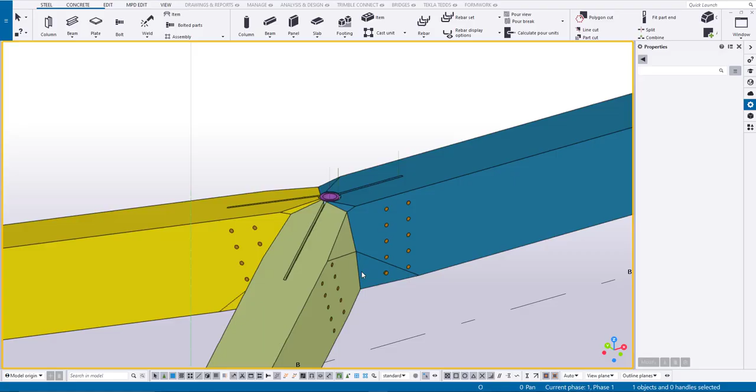This node is quite unique and interesting, as the beams connect asymmetrically and at different angles. I will show you techniques to make modeling easy and enjoyable.

First, insert the central beam to which steel plates will be attached. Everything will become clear soon.

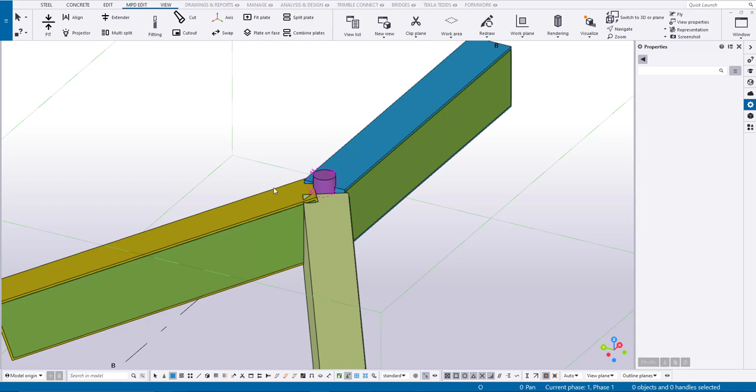Using the new plate on face command, create plates on the beam's faces, and then trim these plates to the desired size using the split plate command.

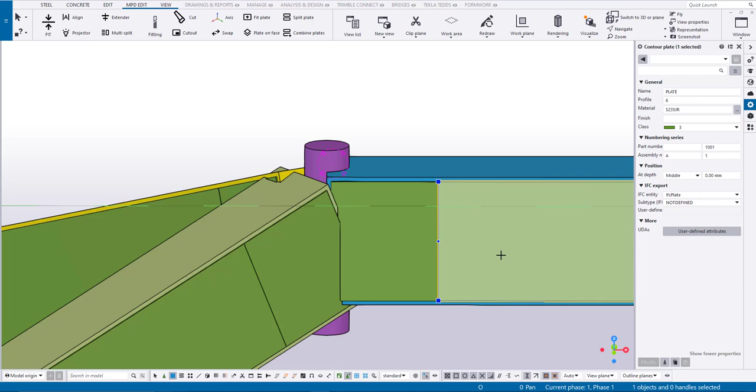A little tip from Projector's creator: this way, you can move the plates to the middle of the beam. Select the beam centerline and horizontal projection direction, and the plates will magically move to the middle of the beam.

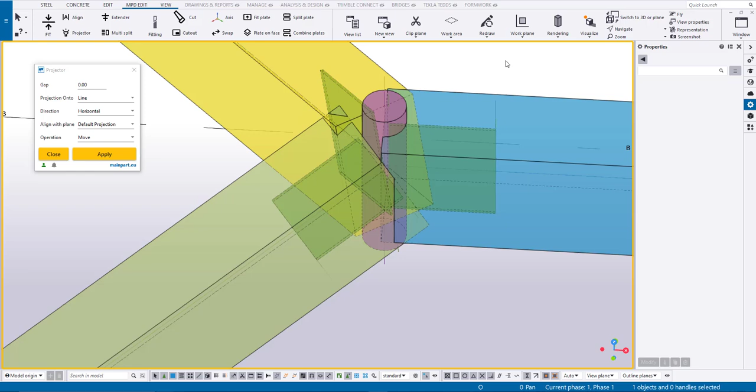Next, using the popular fit command, align the edges of the plates with the central beam, the pipe to which these plates will be welded.

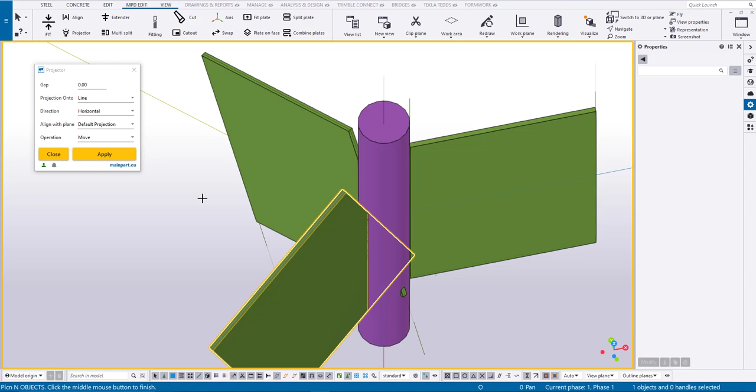Using Tekla's standard command, create cylindrical holes in the beams.

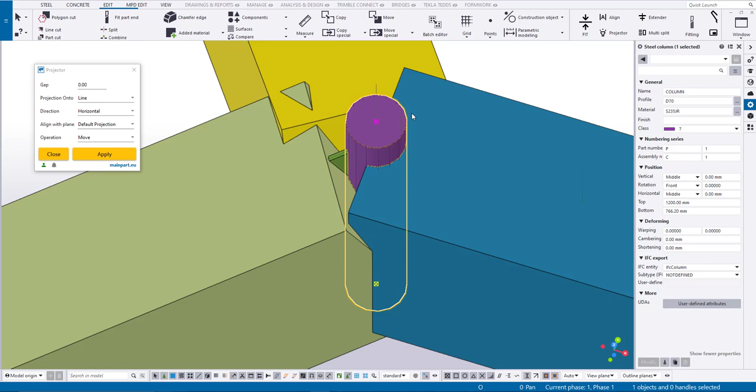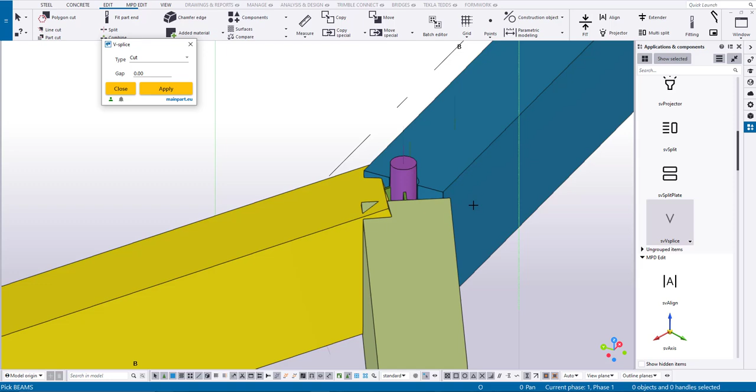Now it's time for the V-splice utility. Make a symmetrical cut between the beams.

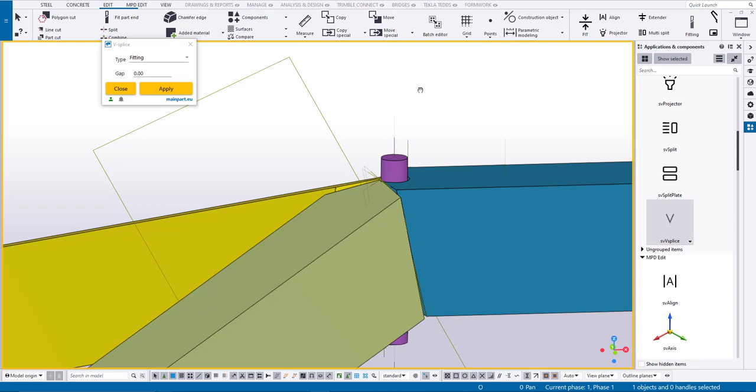With the updated cutout utility, available starting from version 1.20, you can make cutouts for the plates.

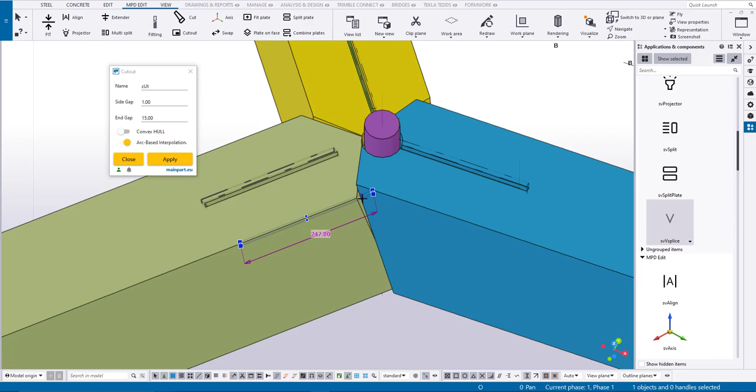Bolts, which I use for modeling dowels, will connect the glued beams and steel plates.

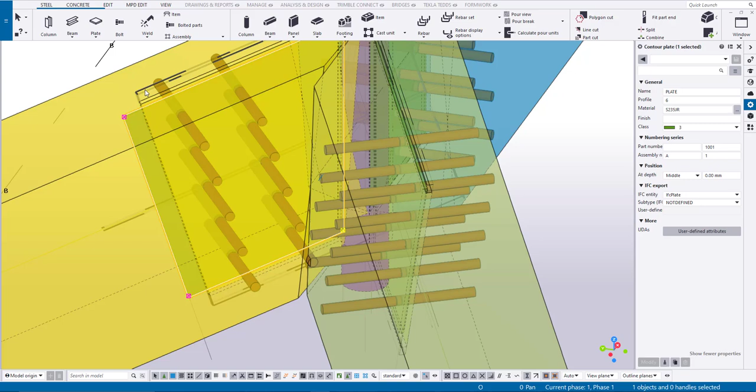Finally, use the svCut command to give the beams their final geometry.